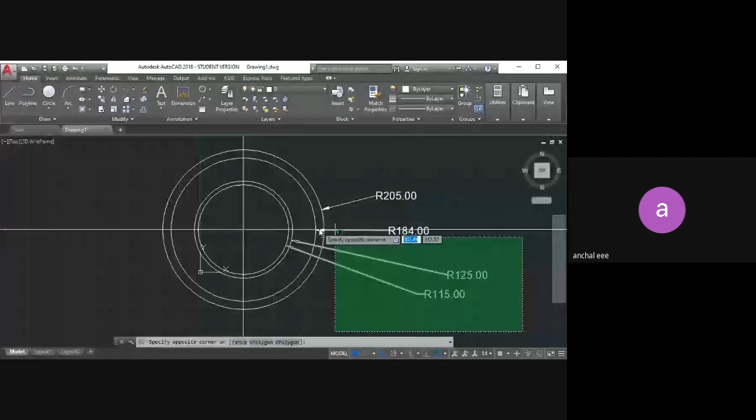One boy is removed, I don't know, without that I cannot record. Vivek Singh is removed. Due to some technical issue, they are removed.

So the question is: draw the pole and core of a DC machine with the following data. The rating of the DC machine is given. Pole length is given as 210 mm, pole width as 76 mm, end stampings 5 mm thick. Pole arc to pole pitch ratio is 2 by 3, yoke thickness is 20 mm. Use suitable bolts for fixing the pole body to the yoke.

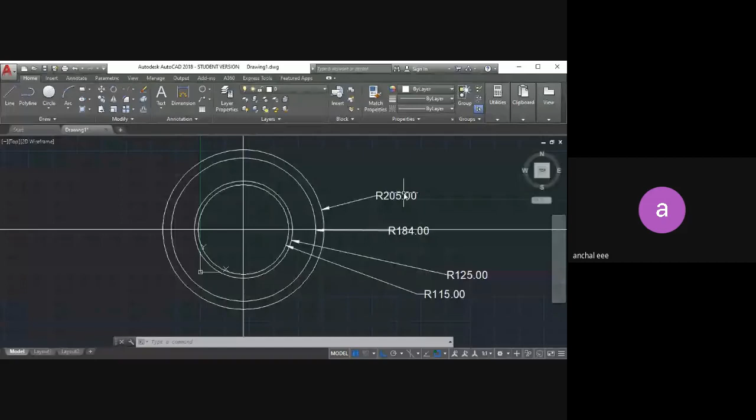So now we will draw one circle as given, the radius of the pole is 115 mm. Start drawing a circle with the starting point, draw a circle of 115 mm. This is the total pole height from the stator frame. This first circle inside is 115 mm, which I have already drawn.

Then draw the next circle of 125 mm. It's not given directly in the question, but as we took 115 mm for the length of the pole, we also want to draw the pole shoe. So with a 10 mm difference, we take one circle of 125 mm for the pole shoe.

Then you have a radius of 184, so we will draw the 184 — that is also approximate only. That is the stator frame. So total height is how much? 205. So from here you have drawn the 205, you will get a stator frame.

From there, again we have taken some 184 radius to draw the stator frame inside. Then 115 is the total pole height. From this point where I am pointing now, from here to here is the pole height. So that you have drawn, like this. Now you all draw the circles of all the radii.

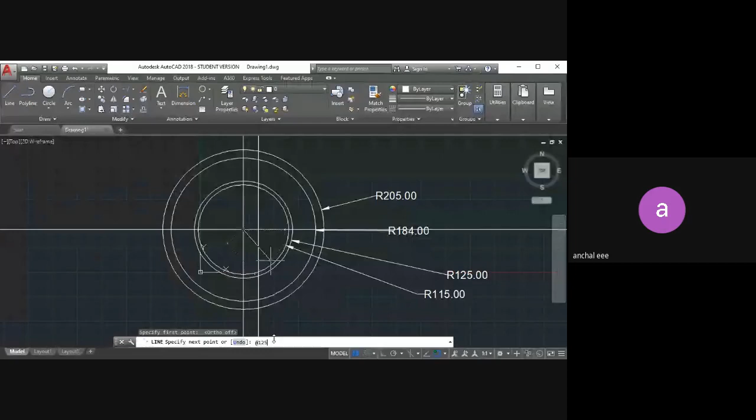I will draw the angle of 120 degrees so that I can get 60 degrees with the y-axis. So what will we do? I'll take a line, turn off your ortho mode, take the center, right? Add at the rate of 125, angle of 120 degrees, enter.

One second. At the rate of 125, angle of 120 degrees. No, here, from here 60. Okay, at the rate of 125, 125, at the angle of... so now you have got the 60 degree angle.

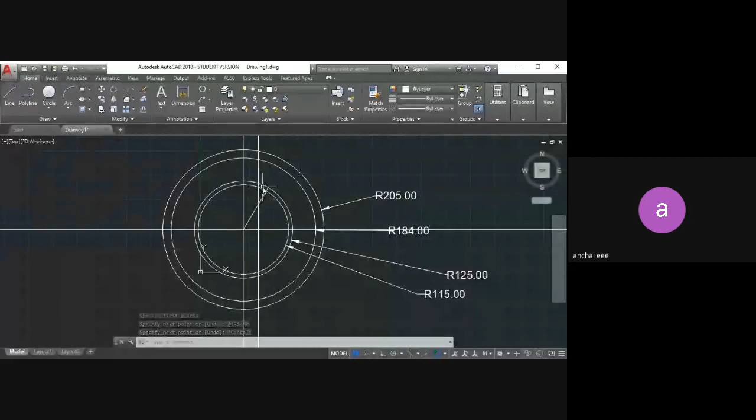So this is your pole shoe you have got, you have got the pole width. Everything is done now. Now what we will do? We will trim it off — trim all the extra parts so that we are not confused.

Before that, as you have to draw the stator frame too, what we will do is draw one more line. At the rate of some distance — last my circle is of 205 — so 205, angle of 45 degrees.

Firstly I have to specify the first point, and then at the rate of 205, angle of 45 degrees. So now I can cut this stator frame also. I'll keep this line also before, only before trimming off. Don't trim it before, first draw all these things. I have selected everything, I'll start trimming off whatever is required till there. That line is not touching to it, so it is creating a problem.

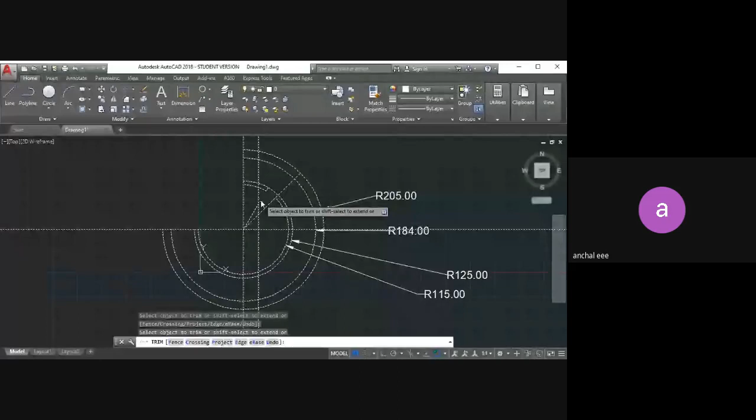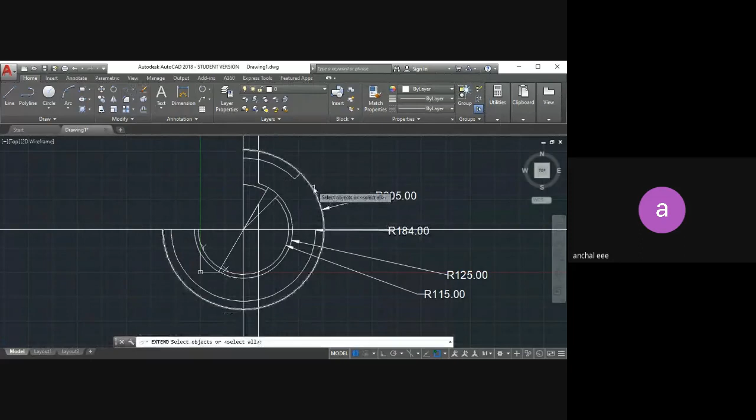These lines are not touching, so what will I do? I go to extend and extend those lines so that I can easily trim it. Now we will try to trim.

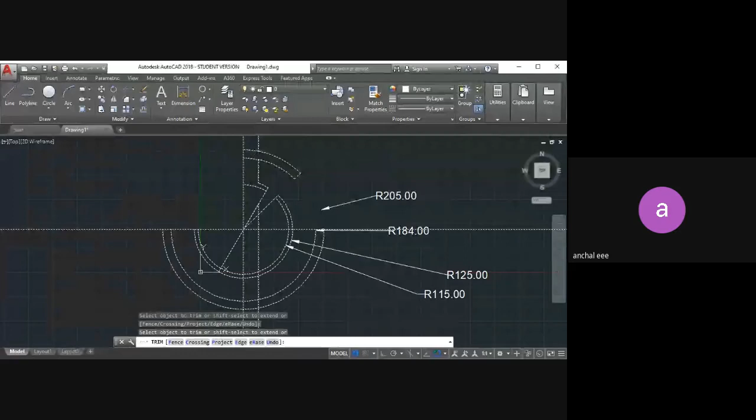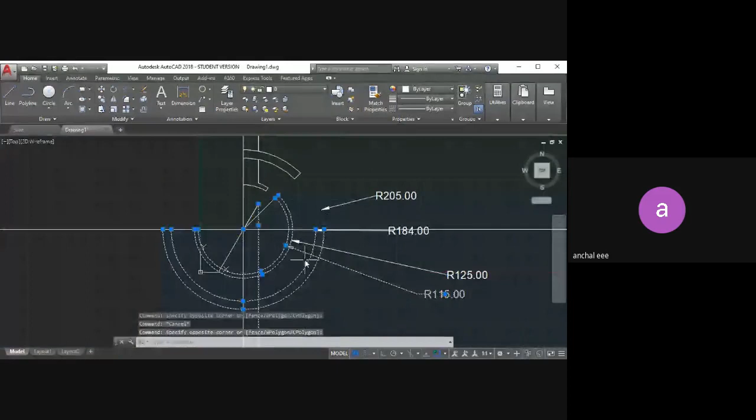Okay, so this part only I need, I don't need anything else. So what will I do now? I'll take these things and delete it off. It's easier than trimming it.

So this is done. Now I will draw the bolt also so that I can mirror together. So you can see bolt width is given as 10 mm.

The thickness of the bolt is not given, so approximately we will take it as 10 mm. Did ma'am give you any approximation, or told you 20? She has given us 20 mm. Okay, yes, so we will take the offset of 10 mm then, right? So 10 from here to here, correct?

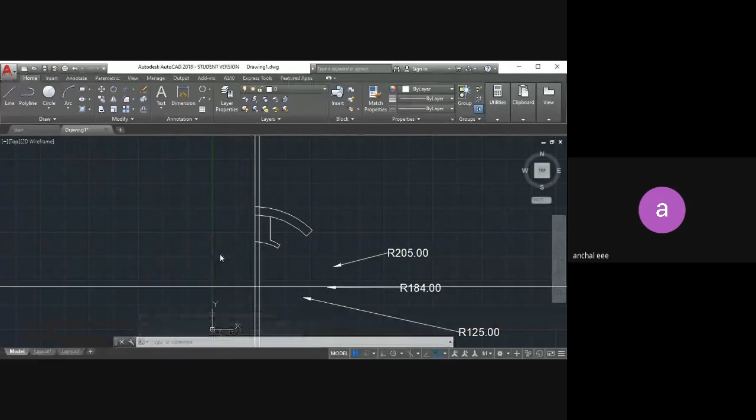Then what is the depth she has given? What is the depth? 70 mm she said, that is also approximation. So from here, take 70. Okay, 70 and down, from this point take down 70.

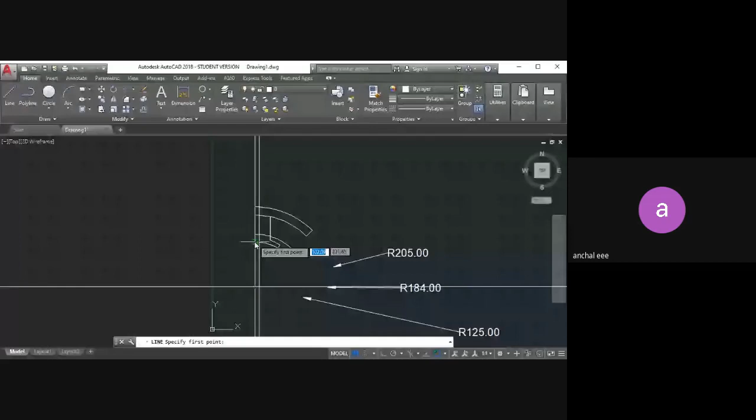I hope it is clear. Then you draw to get that cone from the down. What you do, this one. Then with your polar tracking, you go on. Turn on the polar tracking at the angle of approximately 45 degrees.

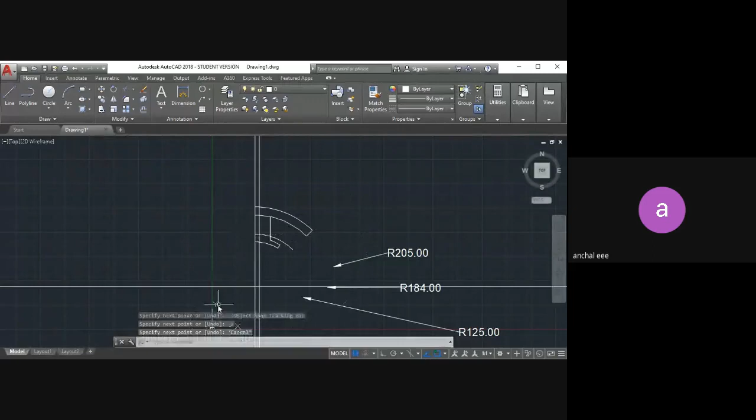I will little increase the size. One second. Take line, starting point is this one. From here, 45 degrees angle is there. It's not compulsory that you have to draw the 45 degrees, but it will be good if you take it.

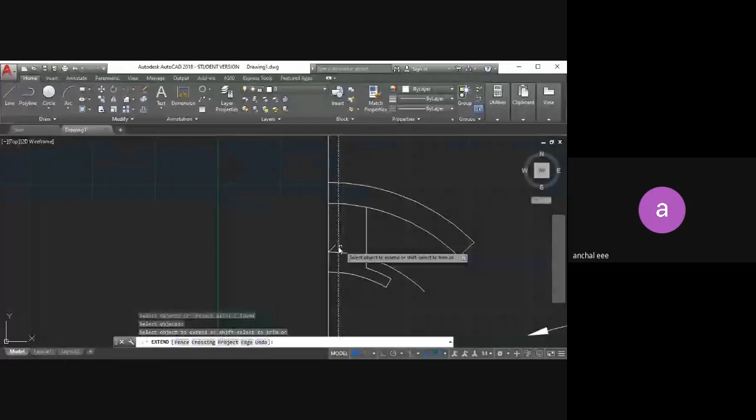At the rate of some 10 mm, I will draw angle of 45. See, if it is not touching also and by chance you have not taken the proper dimension, you can extend it, right? So it's done. So you have drawn that also.

Now we have to draw the bolt on the top of the stator frame. So for that what will we do? From there, I will take some 5 mm offset. I don't know how much ma'am has told you to take. Or we will take 5 mm, or 10 we can take because total is 20. So from here, draw one more.

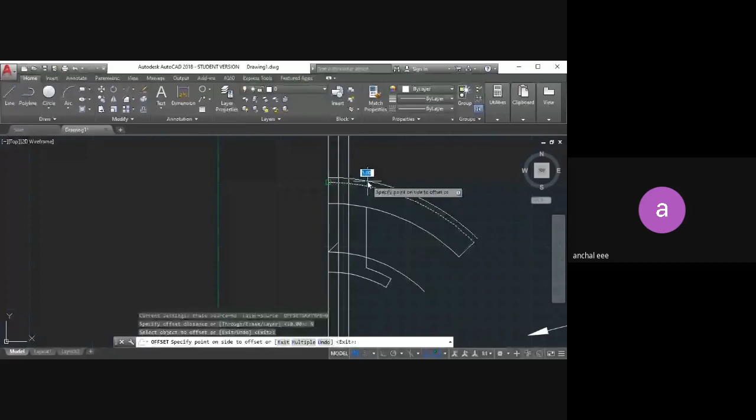Okay, and then approximately offset at a distance of 10 only we will take, or 5 we will take, sorry, from here to here. Now again go to trim. What will we keep now? We have to keep the bolt, I don't want these lines.

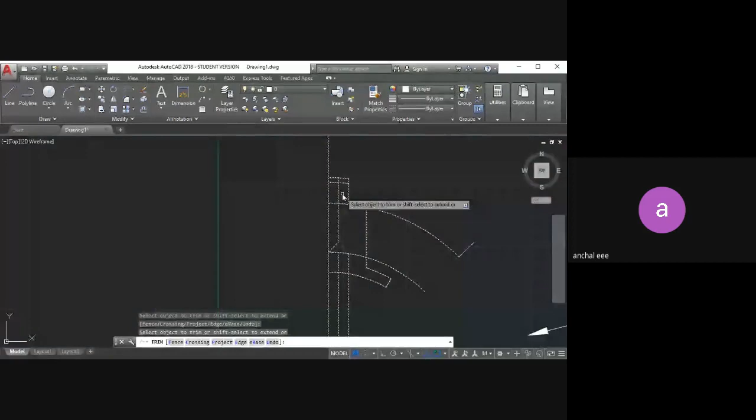Yes, any doubt? Anybody having any doubt here?

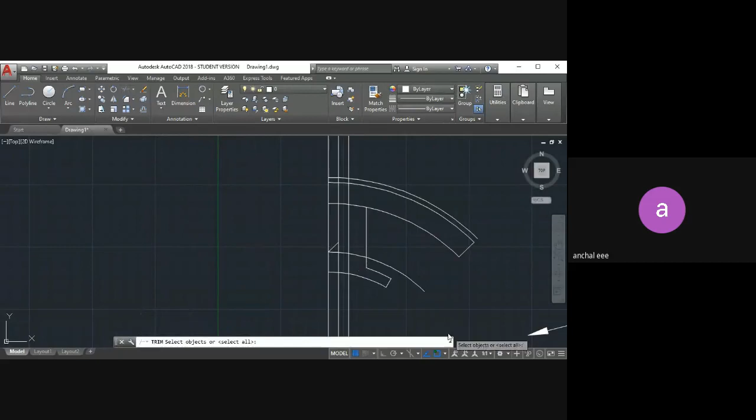Have you got the bolt? Something is wrong, I guess. I have deleted this stator frame by mistake. Now we have to trim this object.

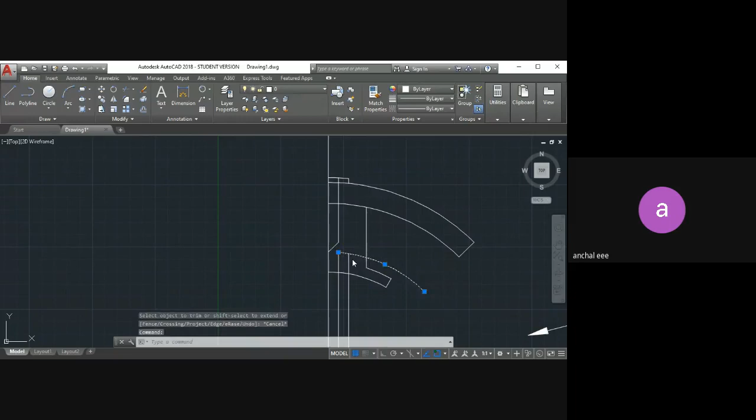Yes, anybody having any doubt here? Please speak yes or no.

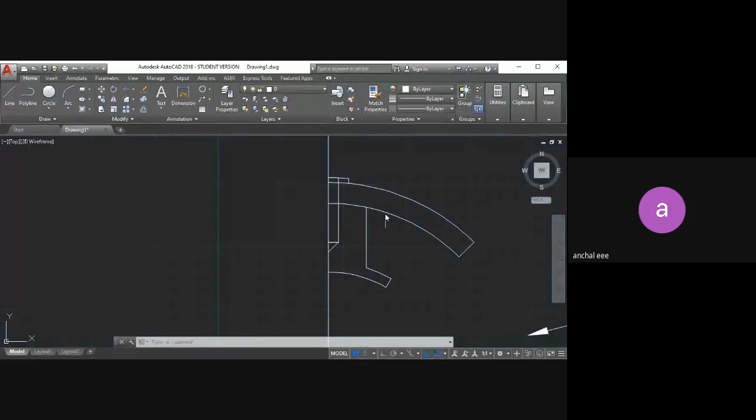We will draw one line here so that we can hatch this part. Now what will we do? We will do hatching, so that once we are mirroring, the hatching is also happening on its own.

So you can take any hatching for this screw down, let's say, and then we will hatch the stator frame also. I'll increase this to 30. I think here for me 45 is only working.

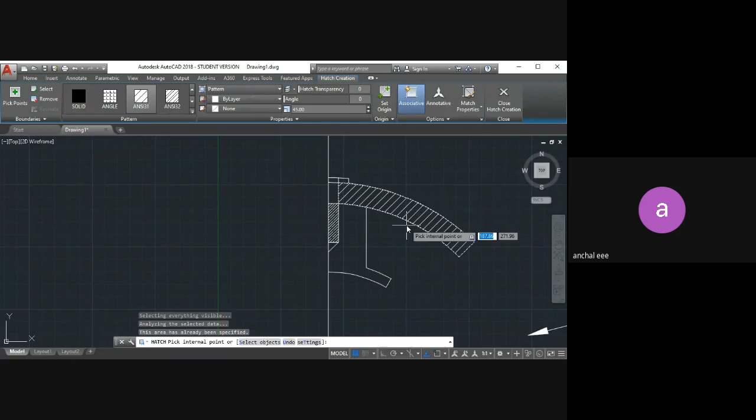It's done. Now we will draw the rivets also. So what are the dimensions of rivets? What are the dimensions of rivets here, radius, ma'am? 4 mm radius, right?

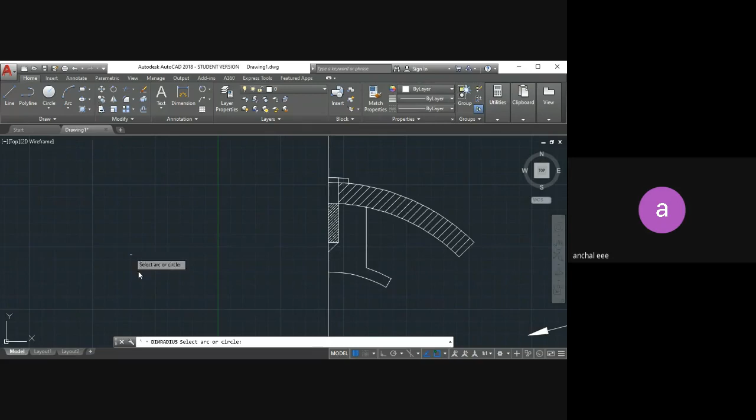So I will select this circle from here and then I give this one and radius, 4 mm radius, right? Yes, ma'am. So 4 mm radius I have drawn.

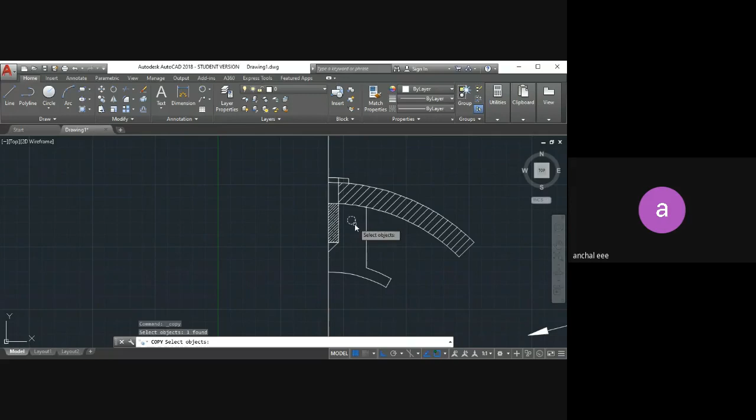You can turn on the ortho mode and copy it, or it's your wish, however you want to do. I selected copy. So you will get this rivets also. I hope it is clear to you.

Now, what we will do, we will take the mirror. We will select the objects, draw the mirror line. So this is done.

As this line is left over, I am drawing it again. So this is done.

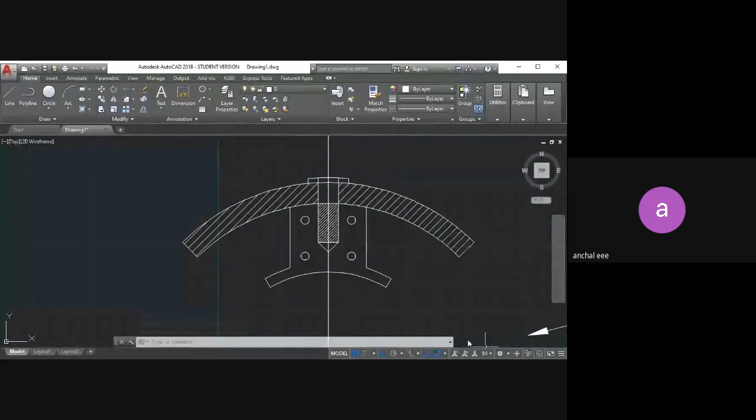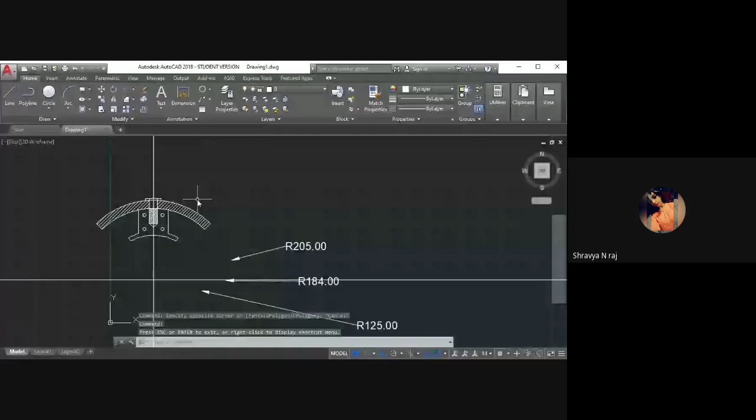Anybody having any doubt here? If you will not speak, I don't know whether you people are there or not. Can you please speak? Anybody there? No doubt, ma'am. Only you are attending class. Shrinkala, I think. Shravya, ma'am. Only you are attending class, Ma'am, the Shravya. Can you explain again, ma'am?

Where were you when I drew it? Ma'am, I didn't know the distance from this line. I know it's 4 mm, but which distance? Approximately, anywhere you can draw.

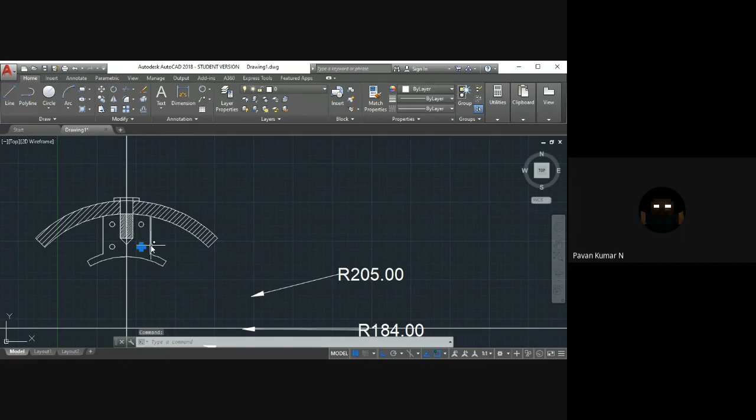I meant the distance between one rivet and the next, ma'am. It's not given, so anywhere approximately you can pull it down. Did you get it or shall I draw and show you? I got it, ma'am, I just wanted the distance. A distance is not given between the rivets, so four rivets they have told you to draw, so you have drawn it.

It's fine. Anybody having any doubt in this? No, madam. Okay. Then draw till here. I'm waiting for you. Draw till here, I will be back.

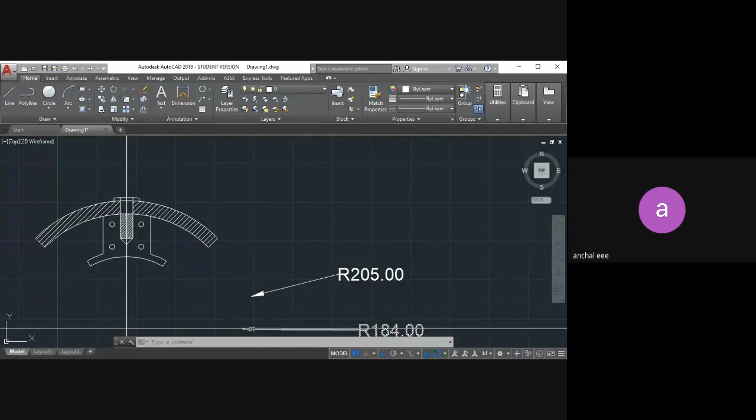Have you people drawn till here? Please speak something. Doing, ma'am. Okay. Or shall I continue and finish it? Then you can see the recording. Yes, ma'am, okay.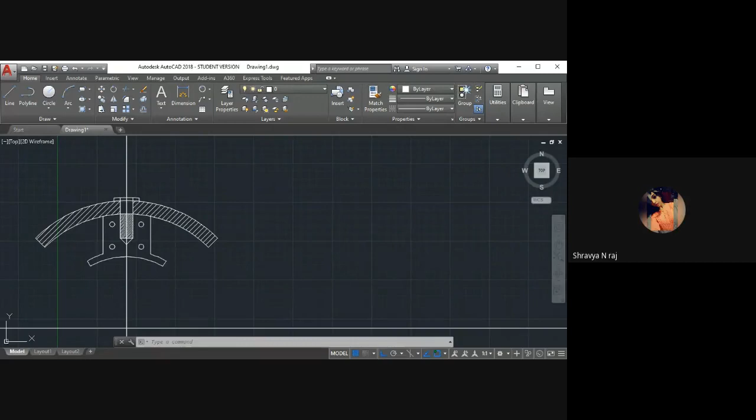Continue. Now we have to draw the longitudinal view. So what we will do, we will take one line and pull it this side.

So we have drawn this line. Now again we will draw one line. We will pull it from here. Fine, so we have got this. And for the bottom part again we will take it from here.

See, from this pole height we should take 115. I have pulled that also. Now I have drawn these three lines. Now I'll draw one more center line here so that I can take the distances very easily, and then we can again do mirroring.

See this part carefully, okay? So now the total length is how much? Pole length is how much? 210. So half of 210 is 105. So what will you do? You will offset at a distance of 105 from here to here. I am doing one side and again we will do the mirroring.

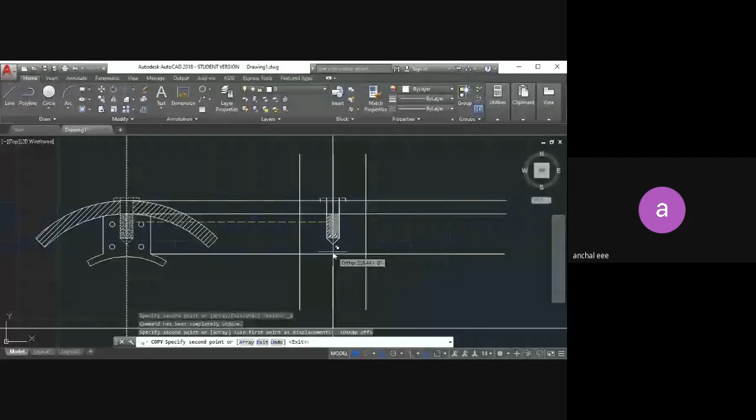Now what we will do is trim it. Trim this. Trim this. Actually we don't need this line, but to get the mirror line from the center only, we will keep it.

Okay, so now take the mirror. Select these objects, then draw the mirror line. Turn on the object snap so that you can get the proper mirroring.

Mirror is not happening, no. I'm taking wrong again, to select the object line. This is my mirror line actually. I was taking the wrong one, that is why it was not coming. And you people are also not telling me.

These people are also sitting around, so... Now, our major part is over.

Now what we will do is trim off. I may have to trim it a number of times, as I have done mirror a number of times, because I did it again and again, I was choosing the wrong mirror line. That is why. Don't get confused.

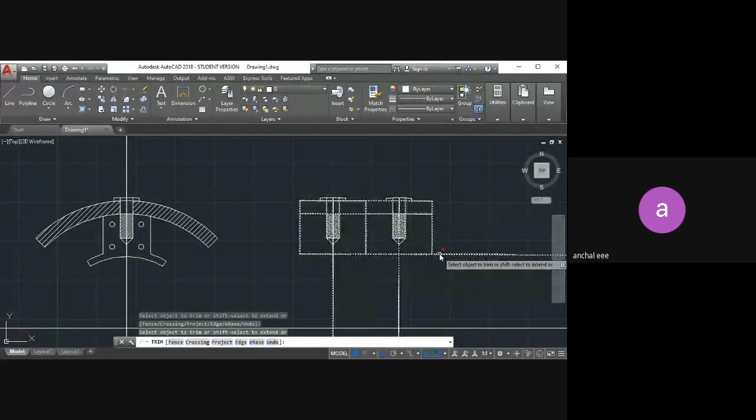Then also I have to delete a number of times. We delete only two. No, Anjali, I think one line only was left. Delete also we have to do a number of times. So it's done, the center line also I will delete it out.

Somebody is trying to enter the class now. So this is done, okay. So we are done with it. What we are left with is the hatching, certain hatching.

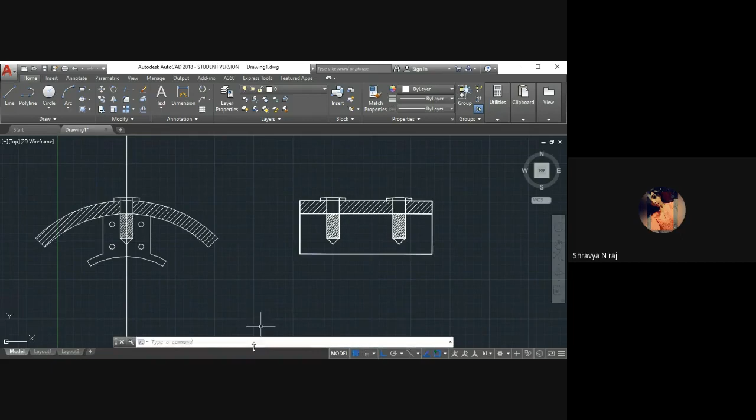This is done. Now we have to put the steel plates. Steel plate thickness is given to us as 5 mm. So what we will do, we will take 3 mm, that is end stamping. What has ma'am given you as end stamping thickness? 3 mm, ma'am. In the book it is written 5 mm. Okay, so we will take 3 and from here outside.

And then from here also. Or what you can do is you can make one side and again do the mirroring. Then, but what you need to do here is because again we are going to hatch it, right? This mouse is not working.

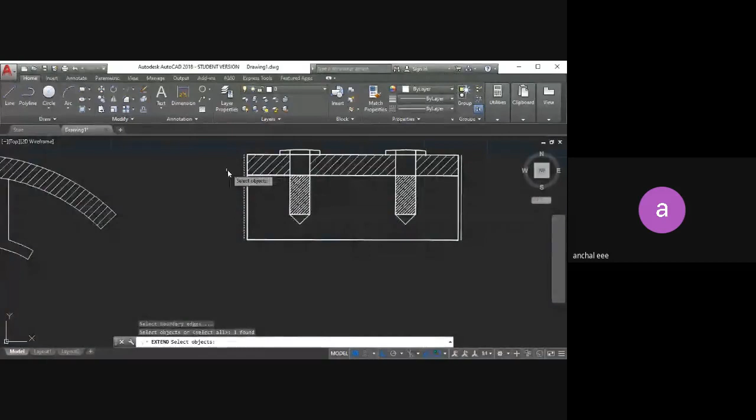So from here I will extend it. This is the same line. Now extend this line again. Extend from here, extend with respect to this line. Extend of this line. On the steel plate, no, you can see in the figure, it should come little down. It's not like that, it's there only.

Okay, so you have to make it like in this whole picture. So where you are making actually is from here. So from the pole tip you are making it.

So we are done with it. Okay, what you can do is you can trim it, hatch it, and then you can mirror it.

Is it clear? Anybody having any doubt till here? Solid hatching you will take and you will hatch this part. Yeah, this mouse is not working properly.

So this is done. What you can do is what I did here, you leave it, delete this line, and then you mirror it. Now mirroring again, we have deleted that center line which you would have not deleted before. So what I will do, I will offset again at a distance of 105 so that I can get the center from this line or this line, this side, so that now I can take the mirror.

But before taking the mirror, I will draw the rivets also. So what do we have to draw? We have to draw the rivets. So otherwise what you can do is you can copy this rivet from this side and paste it there, or you can draw again 4 mm. I would like to copy only because copying is easy.

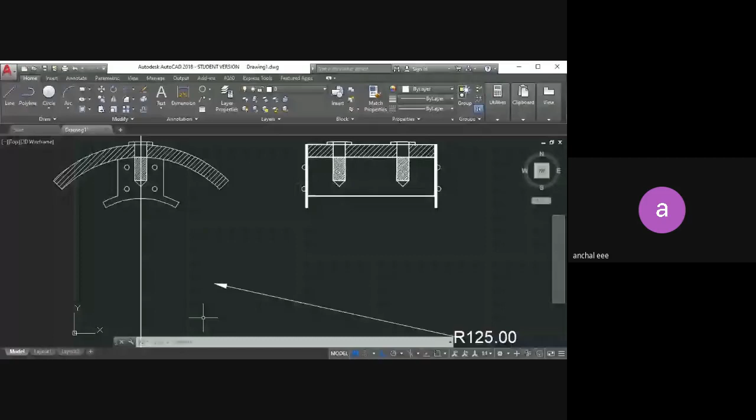And coming to question number 2, are you able to do question number 2? Draw the sectional end view of the casing of the conventional 4-pole DC machine with the following data. Are you able to do it or not? Please speak yes or no.

No reply at all. I really don't know, obviously I am only talking here. Yes please, kindly answer, are you people there? Yes ma'am, yes ma'am. Question number 2, are you able to do?

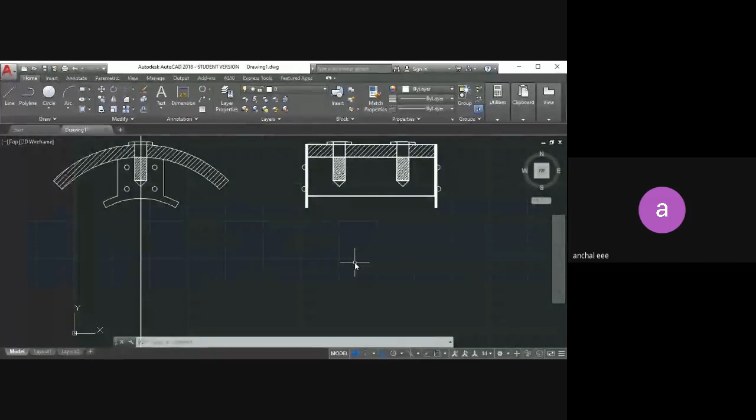See, it is same only. What you need to do is, here we have drawn one pole. Like this, you will draw one pole and one interpole and then do the array of 360 degrees. Okay, draw half pole, half interpole, mirror it, and then do the array with 4 items with 360 degrees angle. Let the interpole take 45 degrees, and your interpole will come on the 45 degrees axis. The axis which we have drawn here, like that 45 degrees we drew, not to cut this stator frame. On that only your interpole will. Okay, so this is for today.